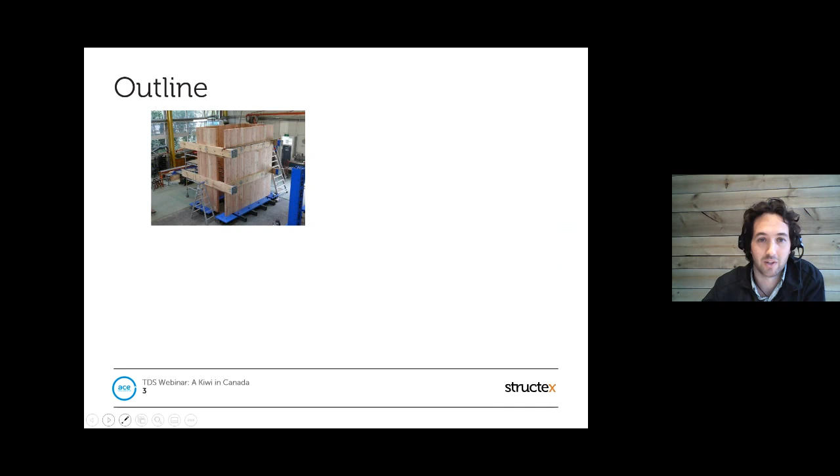So the outline today - I've tried through the presentation to have almost no words, so this is my picturama version of that. I'll talk a bit about some of my background in timber, which has been partially introduced, some of my observations from my time working in Canada and in the timber industry in general,

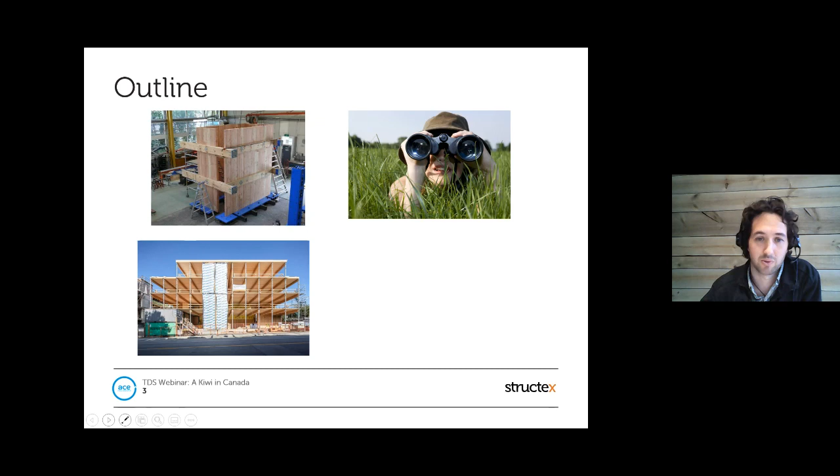and then go through a couple of case studies. The first one is the Fast Epp new home office building in Vancouver, and the second one is the Keith Drive office building in Vancouver as well.

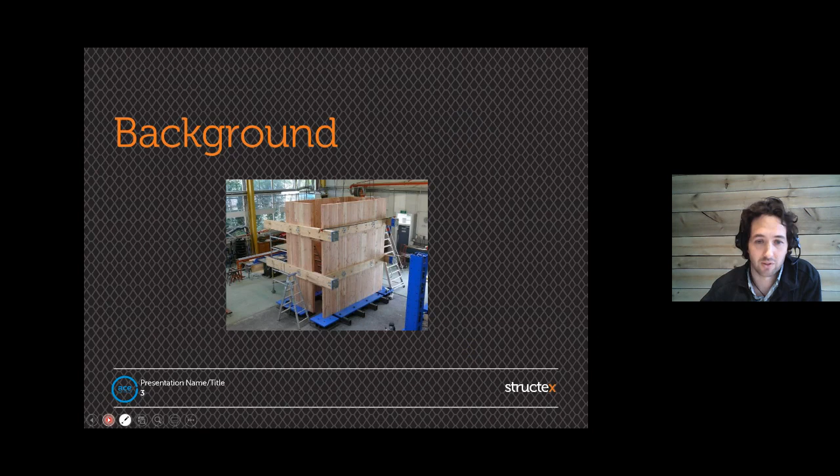So some background - for me, I did a master's out of Canterbury University at the end of the STIC program, looking at post-tensioned CLT shear walls. We ran out of LVL at that stage, and CLT was coming out of Nelson, so we managed to get our hands on some. In this case, looking at stair wells and lift cores and pushing those around.

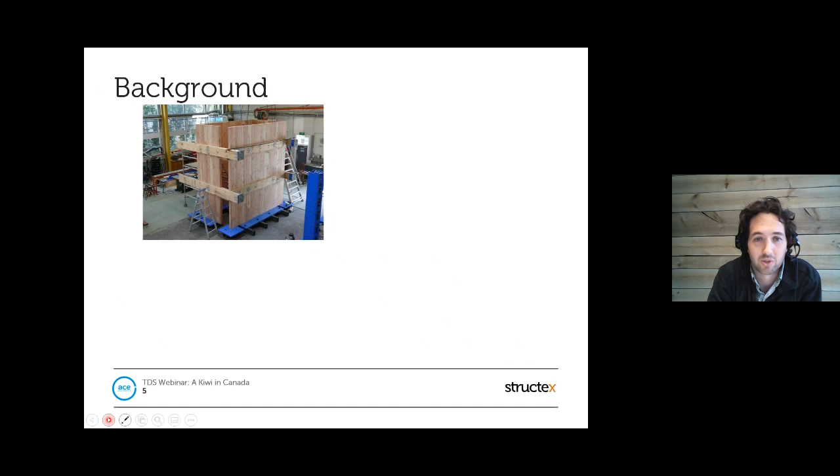Then I worked for Structex after leaving uni for a couple of years, working on a variety of timber, concrete, and steel buildings, but some timber, including the Christchurch Adventure Park buildings that some of you may be familiar with.

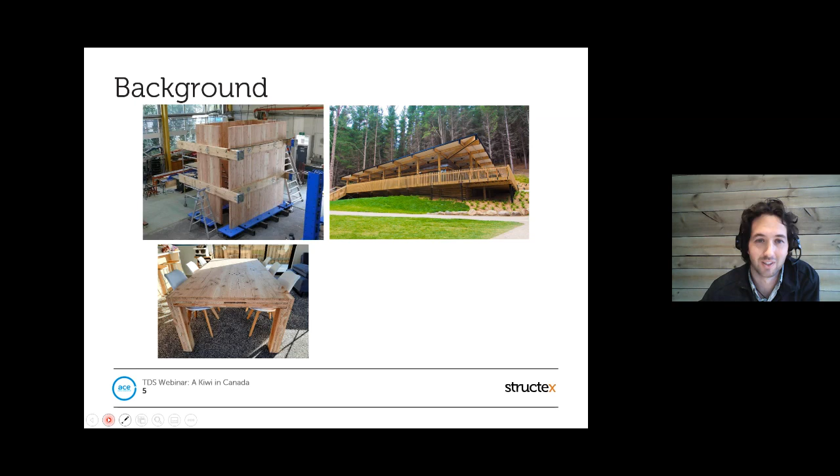So I kind of took some general learnings from all that and my masters. One thing I've found - some people say that timber isn't that recyclable, but I've found plenty of opportunities, especially for the post-tension CLT walls, to make great tables, even with voids for post-tensioning strands.

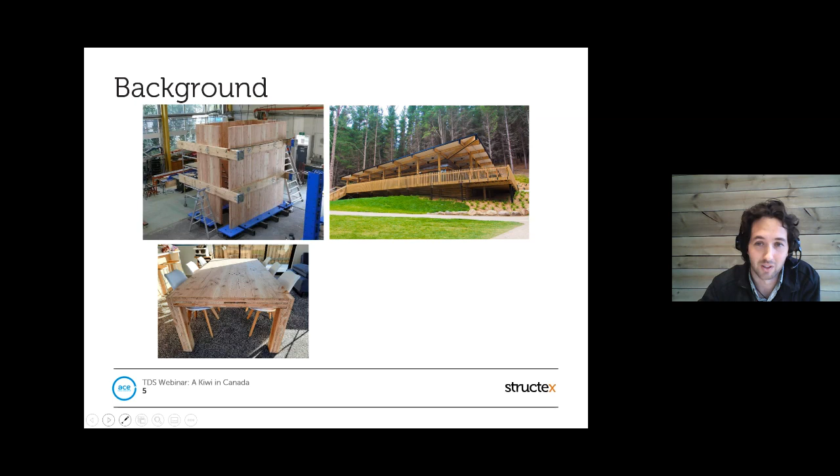But anyway, I wanted to broaden my horizons in timber a bit. So then I thought, what has lots of trees, what's still in a seismic region, where do they predominantly speak English, and where can I convince my wife to go? And that was Canada, and a company called Fast Epp, which was put onto me.

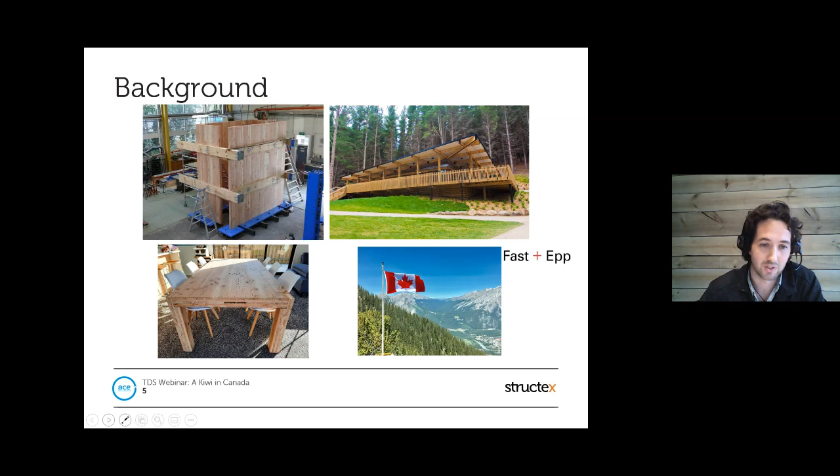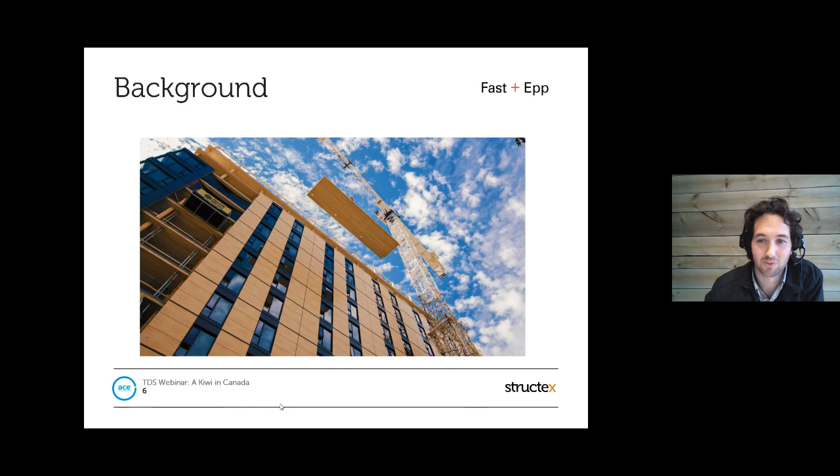I guess I would say it did have a concrete core though, or 2 concrete cores for the lateral system, but certainly the gravity structure was full timber for those 18 stories. This one was quite interesting, where they managed to get rid of all the beams, just using internal columns and point-supported CLT, which certainly has its own challenges and requires quite a lot of columns. But being student accommodation, that was easily accommodated within the room layouts.

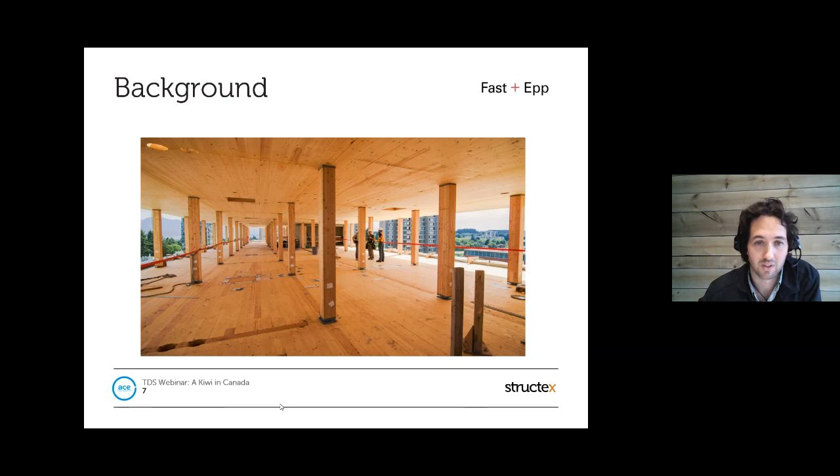From a constructability perspective, the building went up really quickly, at least a floor a week, with only 3 or 4 guys on site. The crane would drop in a whole bunch of panels, lay those, then drop on a pack of columns, and the guys would stand them up.

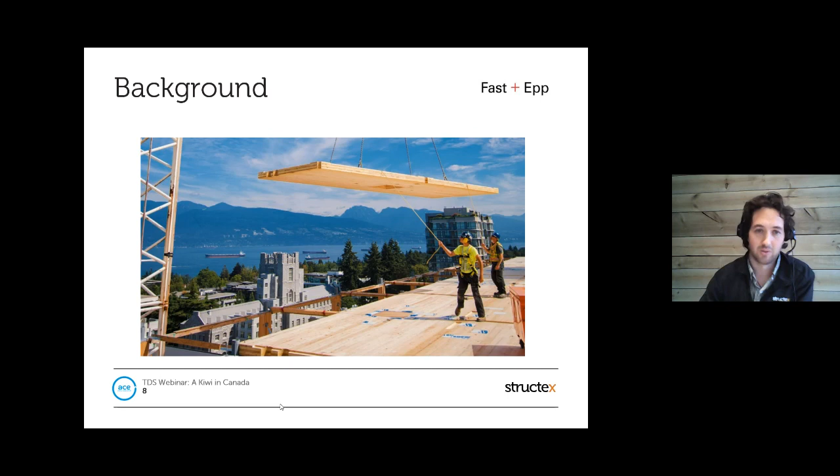Then the crane would go away and be lifting in the facade panels on a couple of levels below, and it ticked along nicely like that. There's plenty more if you want to look at this, quite a few webinars through the Woodworks Canada organisation that you'd be able to take a look at, but certainly worth some investigation.

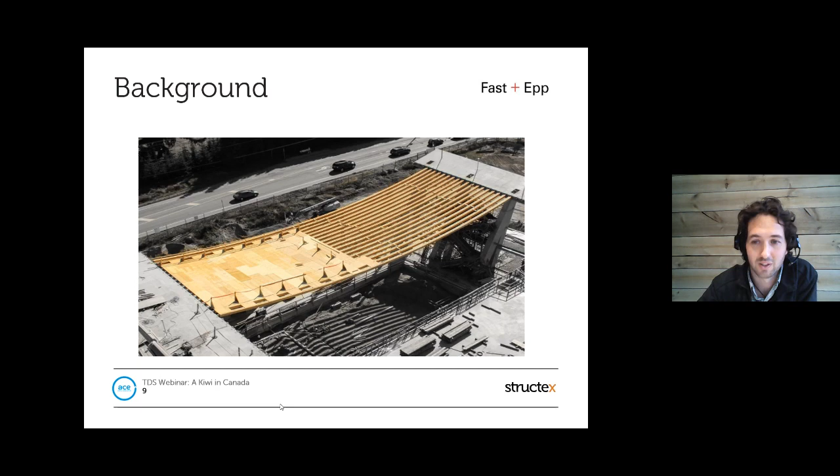Another favourite of mine from Fast Epp's history is this building, an aquatic centre in the wider Vancouver area. Probably the main feature, which I think is fascinating from a timber engineering perspective, is the use of timber beams and catenary action, spanning 55 metres with only 250 deep glulams, which is pretty unreal. It's just a couple of pairs of glulams running across, with a bit of plywood on top, and to achieve those spans is quite amazing.

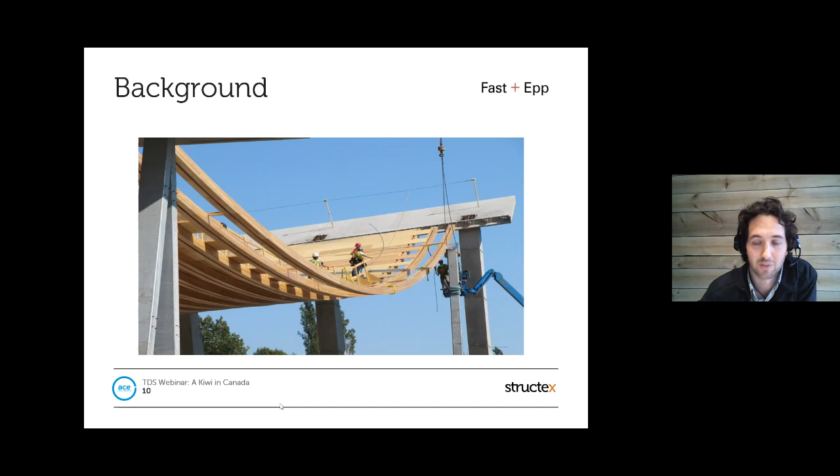And it also looks great from the underside, and I don't even mind the concrete even.

So yeah, a couple of quick examples of some of the things Fast Epp has done. It's only a small snapshot, but gives a little bit of context of the sort of things that they get into.

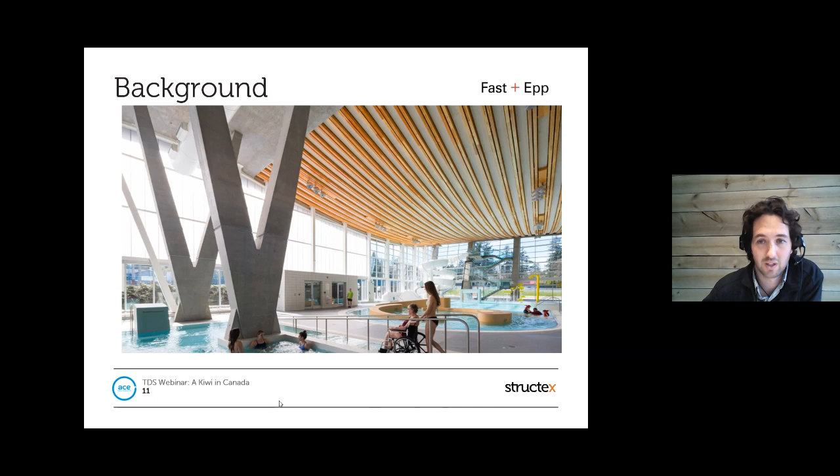So next is a few observations from my time there, in a general sense or at a high level.

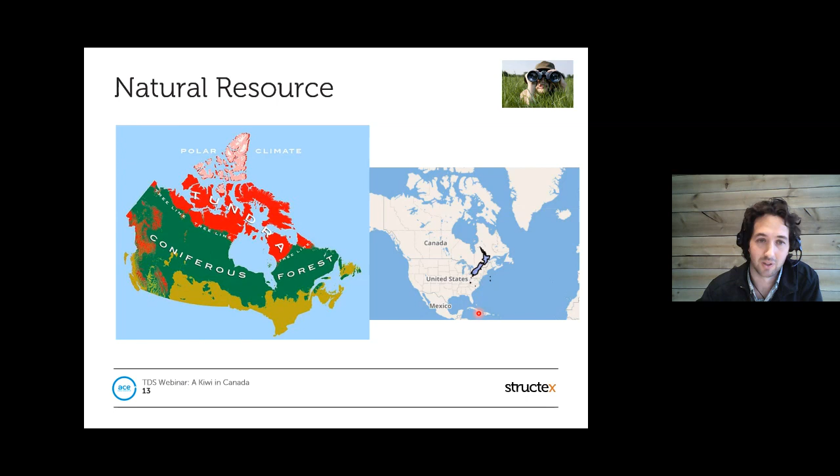It's well advanced, and they benefit as well from the native trees being the stuff that makes really good structural timber.

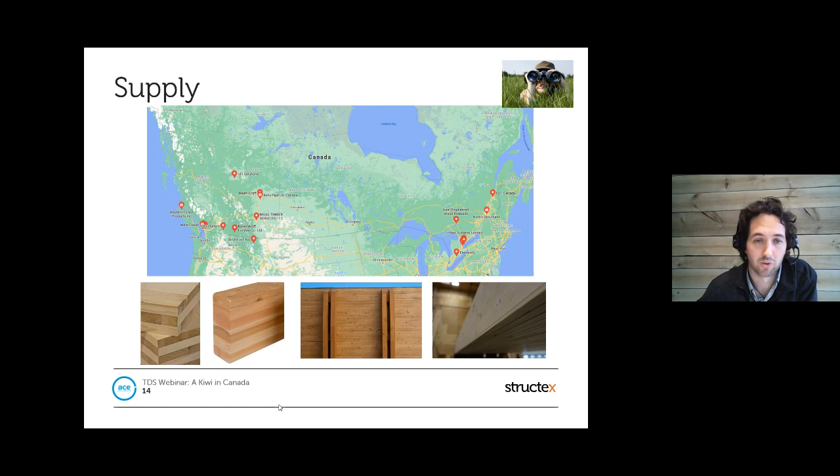Another key point from working over there is, I guess, earthquakes. On the west coast of Canada and the west coast of the US there's a kind of similar seismicity to New Zealand in a lot of parts, on the other side of the Ring of Fire.

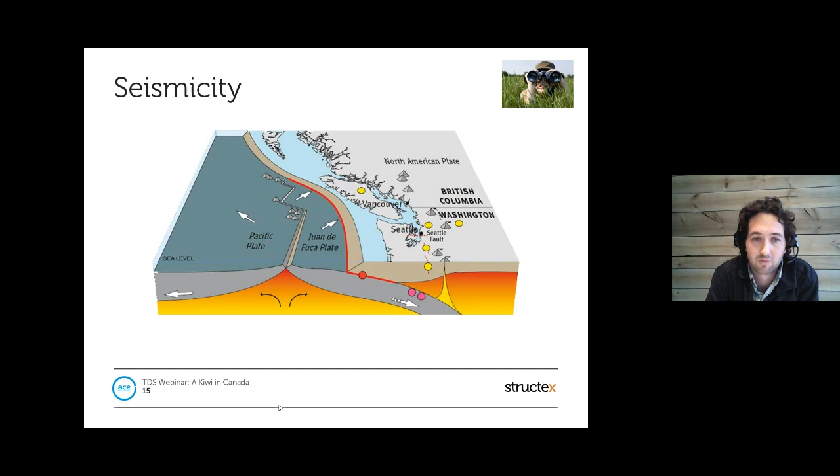From a design perspective, they certainly design for earthquakes. It's all through the codes, and people do it. But what I found was, in a general sense, sometimes they allow for earthquakes in the design at the time, but they're not always thinking about what would happen after the earthquakes.

So there's still a bit of ductile concrete shear walls and that sort of thing going on. I always thought about what happens here in an earthquake. This is downtown Vancouver, a whole bunch of large buildings, a lot of them ductile concrete shear walls or frames. On the right hand side are office towers, and the left side is all apartments.

It always grabbed me thinking back to Christchurch, how many broken or demolished buildings we had, and then what would happen in Vancouver if that happened as well, and where do people go, is my big question. So that's my high level take on a couple of aspects of Canada, in the supply. That frames hopefully into a discussion on these case study buildings.

So the first one I'll talk about is the new Fast + Epp office building in Vancouver, which I think is finished now, and they're in it, which is cool. My involvement on this one was through the design up until the construction phase, and they were starting in the basement construction when I had to leave to come home, but it's all done and dusted now.

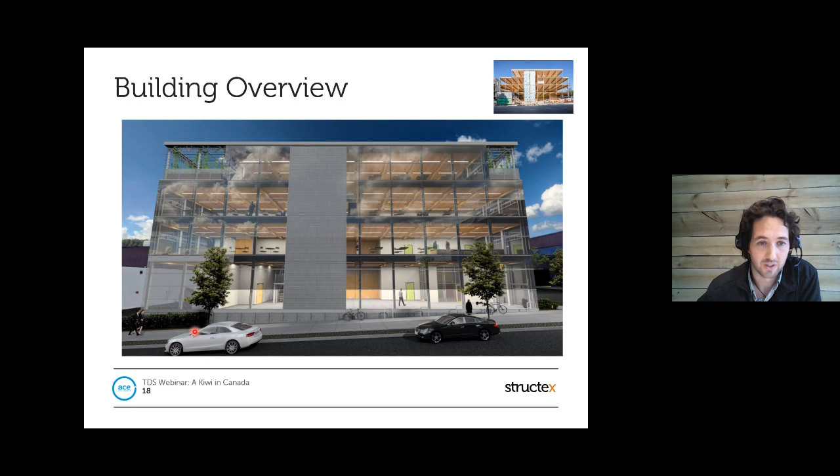The building use is predominantly office with open spans from one side to the other, and a mix of materials from concrete, steel, and timber, trying to use them predominantly where they make sense. Another big part of the design mantra was that it was in some ways a little bit of a test case, so they were happy for it to be somewhat experimental and pushing the boundaries, reflecting a little bit what Fast + Epp have done in the past.

I'll talk about the different aspects of the structure in a minute, but one aspect of the architecture was the use of some dynamic glazing, on show in the shot here, where they can turn on and off the shading of the windows depending on the sunshine to control the heat.

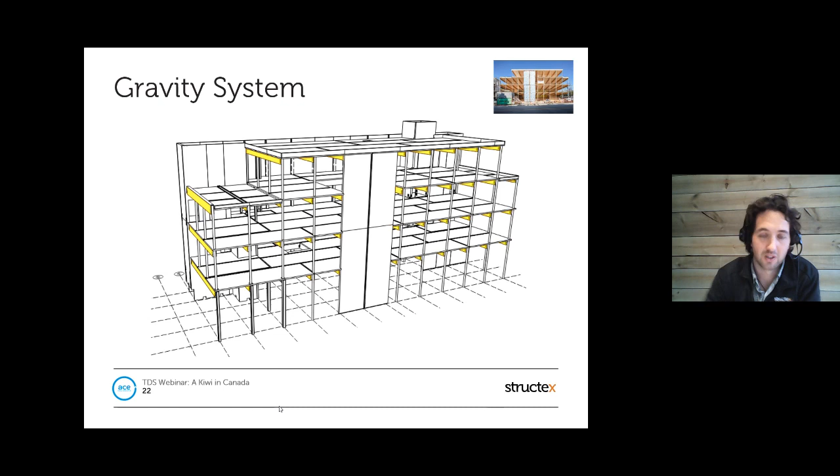So we utilised the char of the timber to provide the protection here, to keep all the beams and the floors exposed. And obviously the CLT also has to provide that char rating, so in some cases you don't get left with that much wood in the CLT floor, but it still works.

Into the columns supporting those glulam beams along the front was steel circular sections, which were kind of a bit skinnier behind the glazing and helped support that as well. So it was really kind of the right material. A glulam column in there would have worked as well, but would be significantly chunkier.

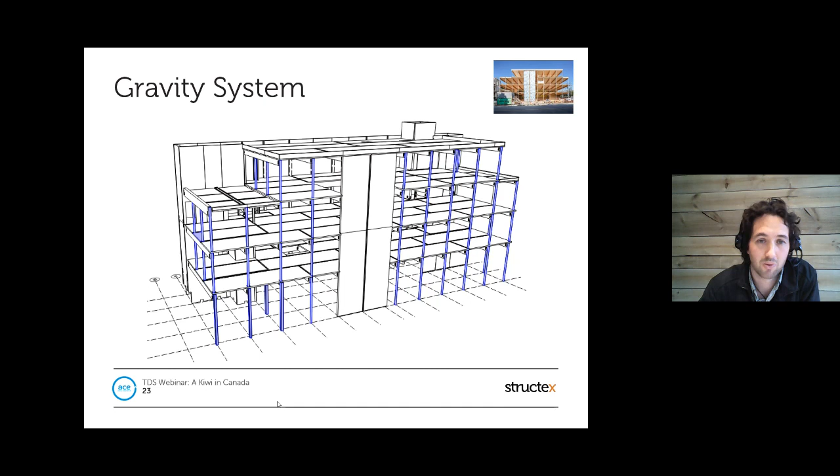So there were glulam columns on the back to help support the beams, and they were kind of semi-composite with the back wall, which were helping in the fire case as well.

So looking through a cross section of the building here at the beam and column elevations, we've got our glulam spanning right across, relatively chunky members to control kind of deflections, probably is the main reason.

Connections at each end were done with a group of bolts, which were set down in the section to reduce the need for any other screw reinforcing and control splitting. So we could have set them a bit higher, but we probably would have had to use some screw reinforcing, like in some of our presentations earlier in the webinar series.

And these bolts as well were required to be fire rated, so we had to set them a certain distance to allow for the char of the timber around it, and then they would be plugged with timber plugs. And the steel was intumescent painted, and painted around as much as possible, at the interaction with the glulam.

On the back of the building side, there was a little bracket with a similar connection into the beam that hung off the timber column, which then had another timber column stacked on top of it. So relatively simple to erect.

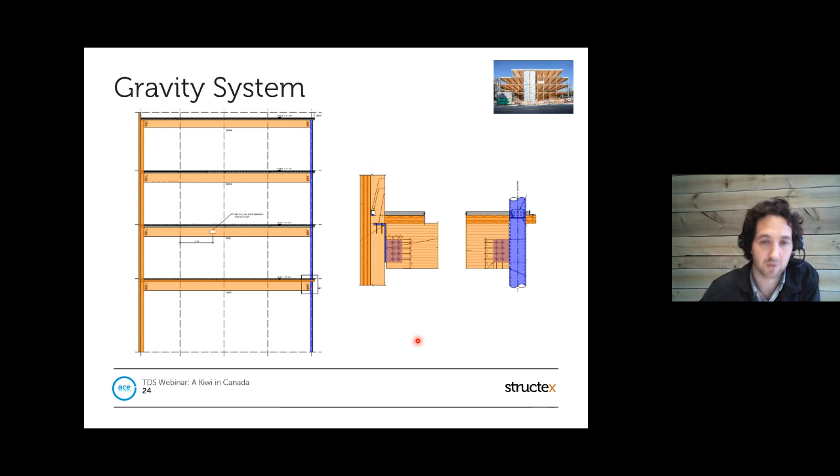We did look at tight fit pins here, but they're a bit harder to install, and it usually takes a bit more craneage time. So we went with bolts in this case, but effectively the design is fairly similar for that.

Now, looking at a construction shot of that installed, you can see the glulam beams across, a whole bunch of holes for the bolts which are yet to be plugged, our steel columns, and the exposed CLTs. So I think apart from the floor, the top of the floor down the bottom there, it's pretty much the finished product. Obviously a few lights and stuff hanging down, but it's really the structure on show in this case.

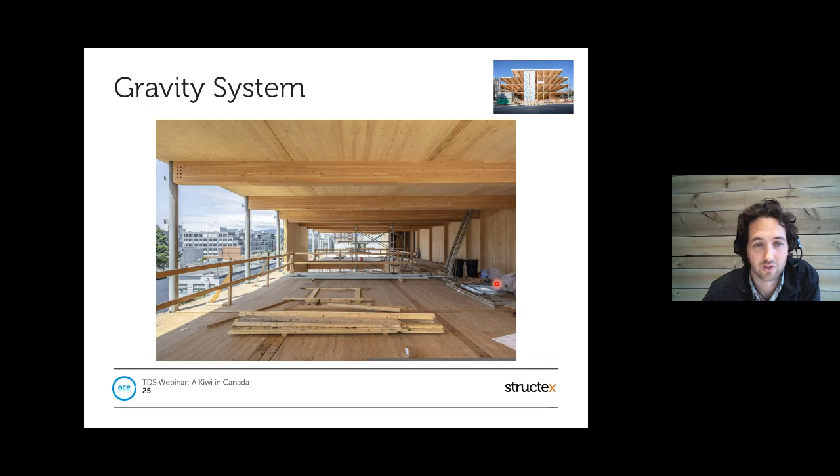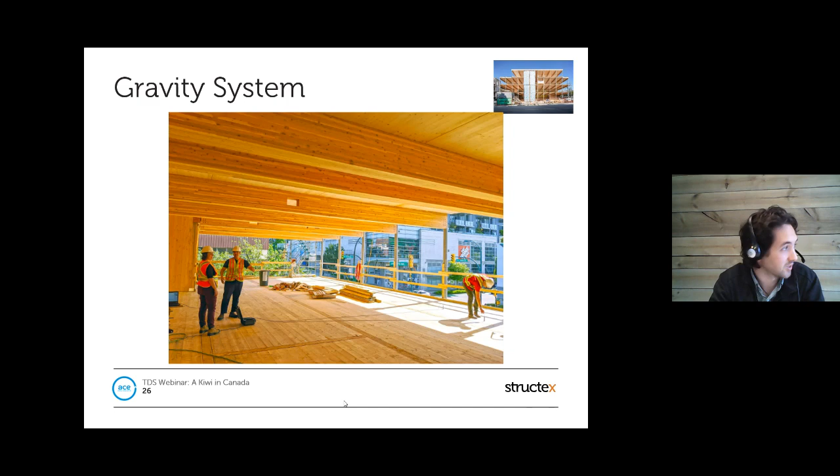So another part of this, which I'm sure everyone will be aware of for these long span and relatively lightweight floors, is vibration is quite an issue, or can be quite an issue. So the beams were designed for strength, obviously, and for the nominal deflection guidelines, but from some analysis there would be certain frequencies where the floor would behave relatively lively. So some vibration testing was done.

There were some prototypes done in a yard offsite, investigating the effects of having the beam and the CLT on top of it, and then what the effects of screwing in are, and how much composite action you get. From a vibration perspective it doesn't take that much to get composite action because the loading is so small, a person's weight, that a screw or a few screws into the top can often provide a composite action between the CLT and the beam that we wouldn't account for from a structural design perspective.

And then they took that initial testing and also did some testing in situ on site, and measured the effect and the influence of adding the concrete topping as well. And then I think the intention is that they do it with the fit out in place as well and see what frequencies they get out of that.

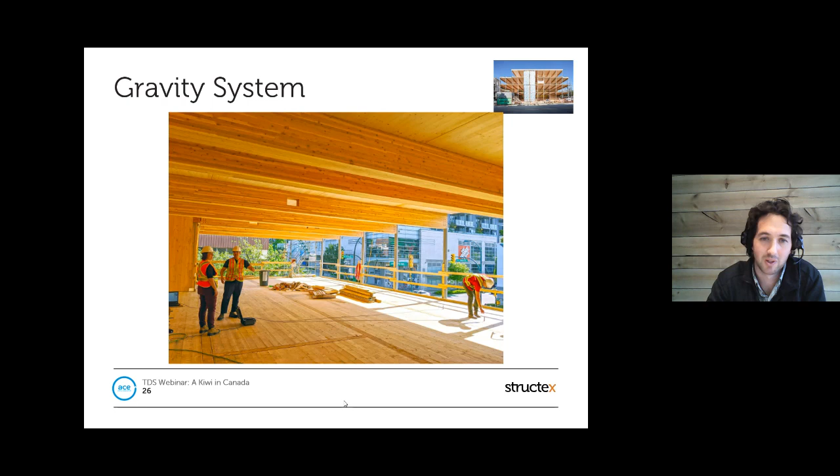I don't have results of the vibration analysis, but we can probably put you in touch with someone that does, and I'm sure there'll be a paper or a presentation coming out on that out of Canada at some point.

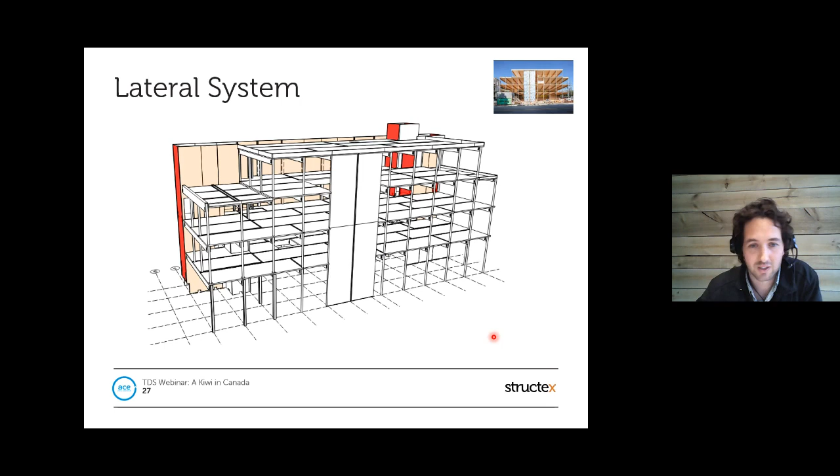So now into the lateral system, which is largely done by CLT shear walls. We've still got our boundary wall along the back, which is a whole series of walls, and then we have a series of red walls marked on here, which are perpendicular to that for the other direction. Of note here is that the two big walls out the front, which you'd think look like shear walls, are actually just gravity walls, and we didn't use them in this case, which took me a little bit to get my head around. I didn't really like the eccentricity of the system.

Thinking back to some of the lessons from Christchurch, it's certainly wise to try and avoid that where possible. However, in this case, part of the limitations on the lateral system were that along the boundary at the top of the page here, we could only deflect about 100 to 150 mils at the top, which is less than 1%. So in the end, I came around to a long, big, skinny wall with a whole bunch of other walls helping resist the twist.

So the system, if we ignore the big dissipator in the center of the page for now, the original system didn't necessarily start out or target to be a low damage system. In the Canadian code, for shear walls like this, you're allowed a ductility of around 2, and then there's an overstrength factor as well of about 1.5. So it's kind of the equivalent of our Sp factor - it'd be like reducing your lateral load by a ductility of 2 and an Sp of maybe 0.6 if it was a direct comparison. But it doesn't really give you a whole bunch of commentary on how to achieve that ductility.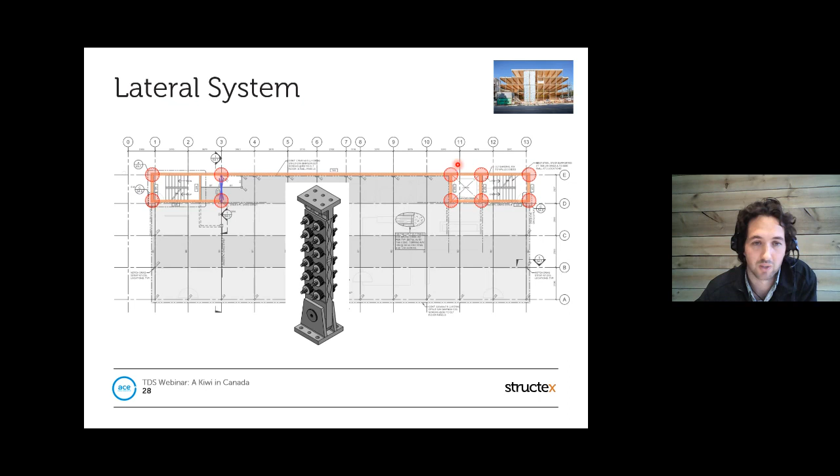So we came - and it was good timing - to Tectonus, which I was aware of from New Zealand, but not many people knew about it in Canada. It was good timing really that we were able to integrate this within the system to give some resilience to the lateral system, and it helped me feel a bit better about the twist, that we had a reliable, resilient system that wasn't going to let go after a few cycles. The wall at the back was effectively designed elastically with splice panels connecting one to the other, which I'll talk about in a minute.

So a bit of a zoom in on the bottom of these shear walls. We had our Tectonus devices - I think these were, from memory, about 700 kilonewtons each, which were connected to knife plates up into the CLT with a whole bunch of tight fit pins, designed to the overstrength of the Tectonus device.

From what I hear, the installation of the devices and the connection between the plates is relatively easy, but they did find it a bit difficult on site and in the shop to install all these pins, because there can be variation between the CLT where the holes have been drilled by a CNC machine and the tolerances of the steel plate, which may not be as tight. There can be some persuasion needed to get some of those pins in.

In terms of a shear key, you might see there's a little concrete plug in the middle - we used that as our shear key. We just left some bars sticking out of the foundation, and then they came back and filled in that hole. So you'd see from this detail, it's not necessarily a pure rocking system - there will be a bit of binding up on that shear key, but with the deflections trying to keep them to a really tight limit, we weren't too worried about that.

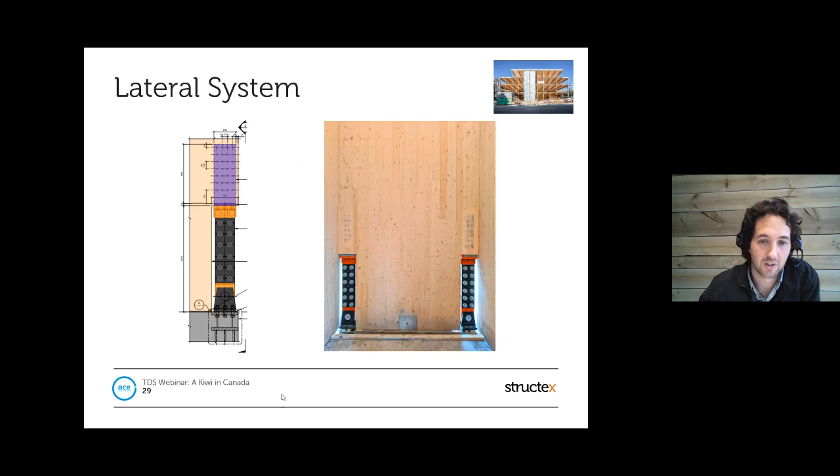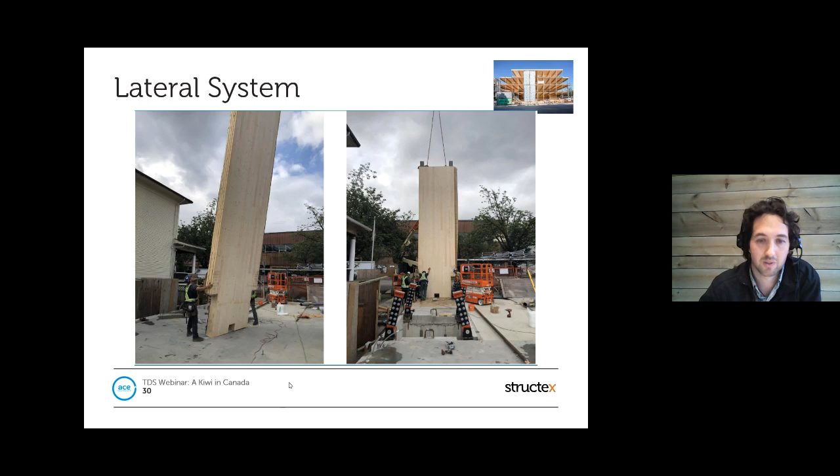There's a couple of shots of the walls going in place, which went pretty quickly. They came pre-installed with the knife plates, and they just bolt them together to the Tectonus, with a little bit of tolerance in the bottom. Put them on the crane with a couple of guys pushing them around, and it went quite well.

The back wall here, again, a series of panels beside each other. The connection between each one was typically a plywood spline joint with just nails and screws holding them together. And then typically you can see here there's a few columns which are usually lined up over the top of the joins.

So in an earthquake, we're expecting these to be largely elastic. If there ever was to be a really large event and you needed to try and strengthen these, we would expect that you would just put some brackets in on each side, or re-nail or re-screw the existing joints. That's kind of the extent that we would expect to see.

So we found this along direction isn't necessarily low damage, but one of the main modes for the along direction is a twist, which is then countered by the Tectonus and rocking walls. So we felt quite comfortable around how the system would perform, albeit not a traditional or a full kind of complete no-damage design, but certainly an increased resilient design.

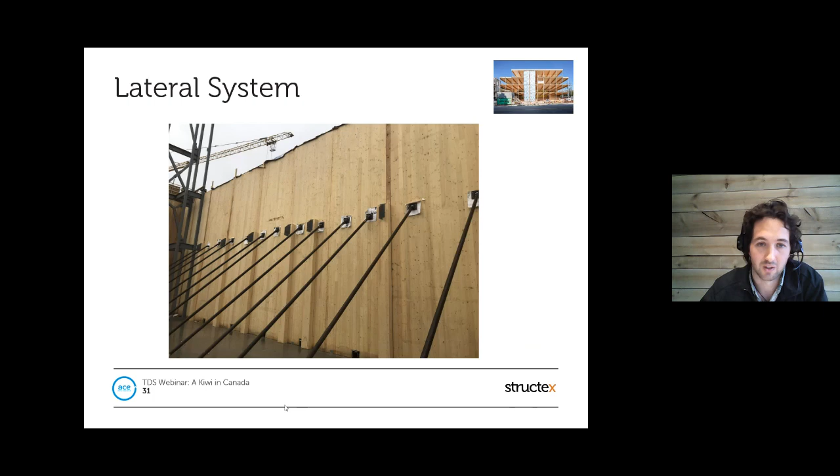Through construction, shots here - I think some of the original goals were to try and have the superstructure go up in about a week. It was a little bit slower than that, partially affected by COVID requirements, I think. But it was still very fast, in a matter of probably the 3-week range to get from the basement slab or ground floor slab to panels on the roof. It was very fast.

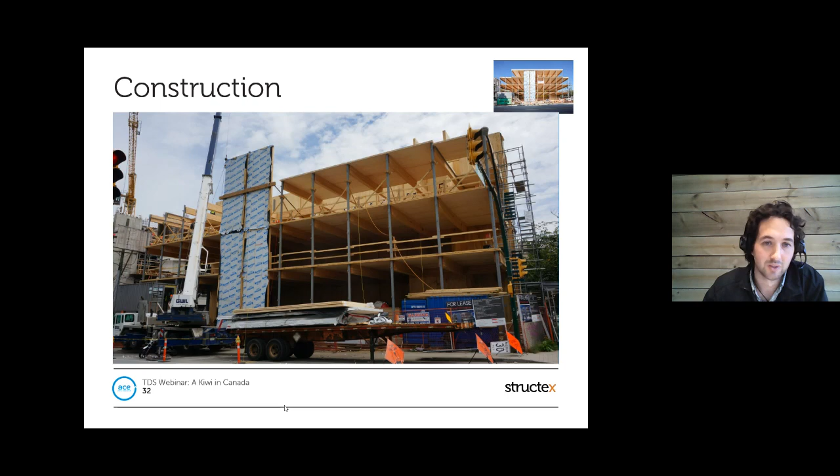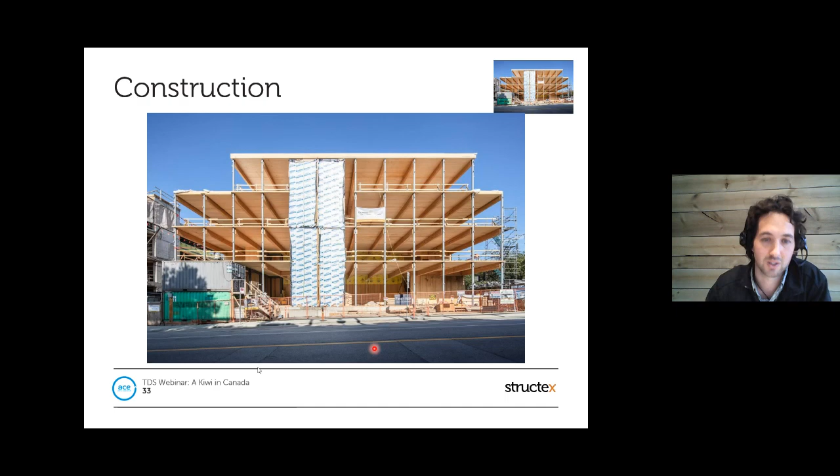And then the kind of final pre-construction shot, again, pretty much all the beams, columns, and floors exposed in the final case. And then looking at the completed building, pretty much as it is now, I think.

Yeah, so that's the general gist of the Fast Epp building. Relatively quick overview, but I'm sure there'll be some questions about it. Probably in summary, the main drivers were speed of construction, utilizing materials in the appropriate manner where it makes sense, and looking at some increased resiliency in the seismic design and being a little bit experimental and pushing the boundaries.

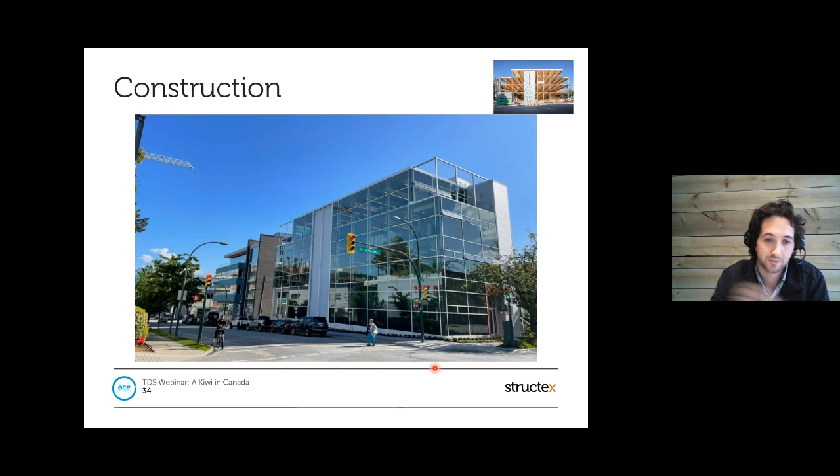So the next case study, which I was involved in, was this building for Keith Drive in Vancouver. I was involved through the design of this until about the consenting stage, and then I was on a flight back to New Zealand. Since then, it has progressed a bit with some component testing, further analysis, and through the consenting or building permit phase, and I think it's in the ground now.

Getting started, in terms of the building overview, it's a 10-story structure over 4 stories of basement parkade, situated on a sloping site, which is relatively significant - over about a story, or 3 or 4 meters, from the back to the front.

The template is pretty much an office layout, so targeting large open spaces, not too many impedances through the layout, and then a key driver was the kind of expression of the structure into the architecture.

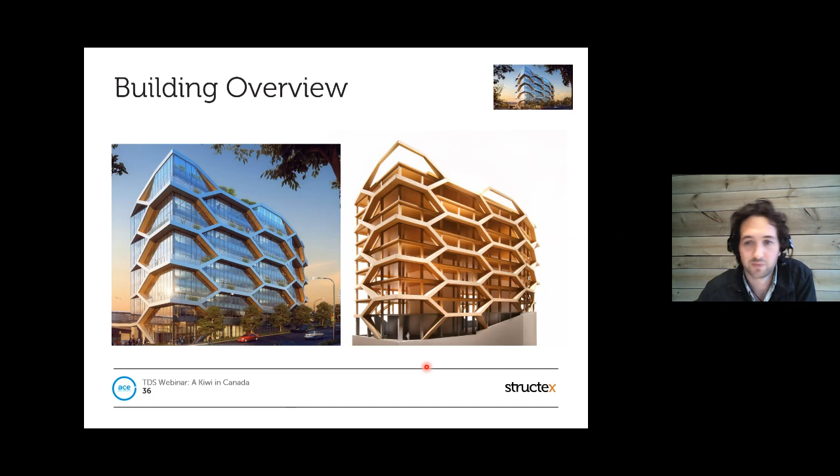So the general structural system is looking at a kind of traditional post and beam for the gravity structure, then mixing in some lateral bracing around the perimeter, which was expressed and made part of the skin from an architectural perspective, and was really driven from quite an early stage. This sort of imagery hasn't really changed.

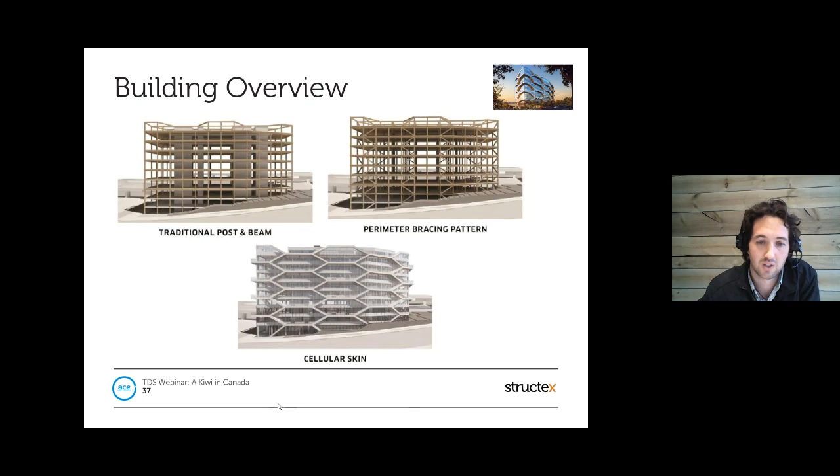So in terms of the gravity system, we had glulam beams supported on glulam columns around the perimeter, steel flush beams through the middle so that didn't poke down beneath the floor, and then CLT floors spanning directly from one side to the other.

So this one's a bit different than the other Fast Epp building, where we're spanning 8 meters directly in a CLT panel, which is not necessarily the most materially efficient, but does allow a really clean ceiling from the other side, and potentially saves some height of the building. If we had secondary beams spanning across, and then CLT on top, you might lose 300 or 400 mils each level - times 10 stories is another floor. So there can be efficiencies in using this, as well as we needed a 2-hour fire rating, so the thickness of the panels helped there.

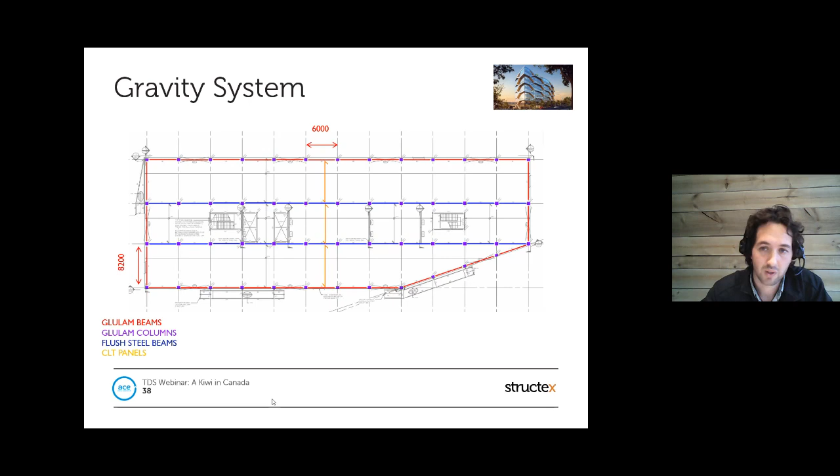So looking at the panels a bit closer, we did use a bit of trickery to try and reduce the volume of timber or of CLT spanning across here.

So in a lot of the Canadian suppliers, they tend to make their CLT panels in kind of billets, so could be 3 meters wide and 2.4 meters wide would be typical panels. So sometimes if you had a 2.8 meter panel, they would make a 3 meter one and cut it down, so you get a bit of wastage.

So what we tried to do here is take a kind of hit and miss approach of a 300 thick CLT that was 2.4 wide, with some little notches in the top, and then an 800 mil section of 3-ply CLT, which would basically span between the two, which was also divisible by 2.4, so they could cut it out of a 2.4 panel. That allowed some room for a service chase to go across the building through that space, and also breaks up the ceiling a little bit from the underside.

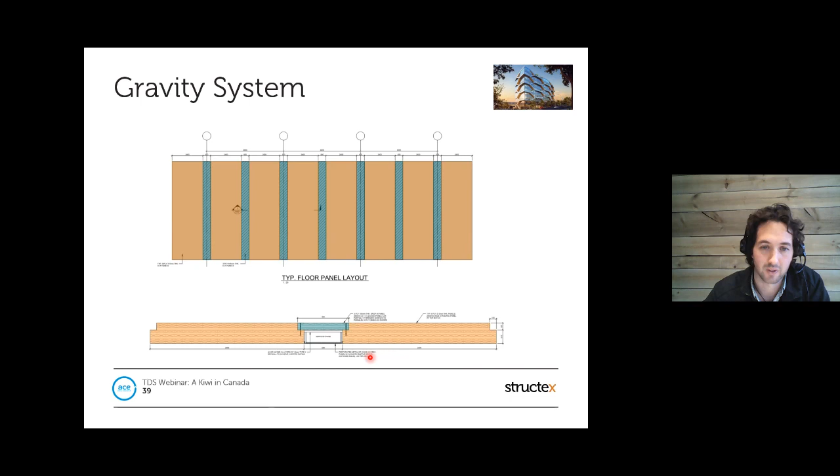In terms of the beam column connections, from column to column, we used a steel SHS that kind of joins one to the other. That was something that came out of the Brock Commons building that worked quite well, where you have pretty much 1-story columns that you can stack up and handle easily, and allows people to do it on site while the crane's doing other things.

Then we had our beams coming into the column using a pre-engineered off-the-shelf product, which in this case was a Megant, originally out of Germany. The column would come with one side all screwed into it, and the beam would come with the other side, and then on site you click it together and run the bolt through it, and you end up with a fully concealed connection, which is also fire rated by the timber wrapping around it. So that worked well through the building, and certainly helps through the design side.

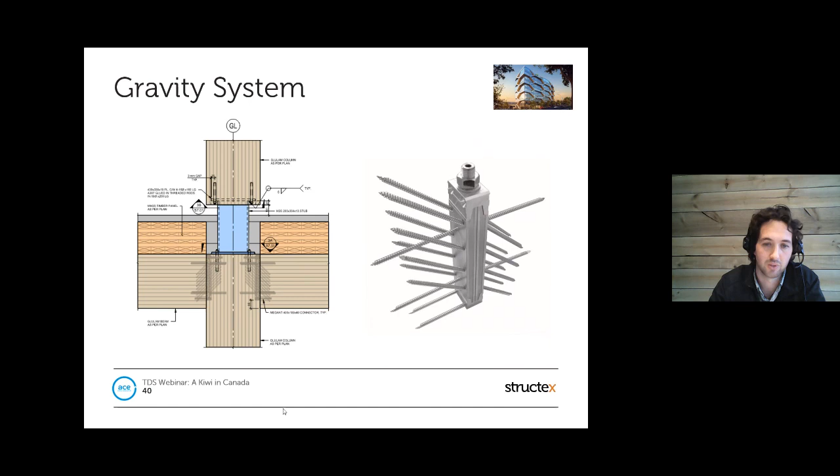And then CLT sitting on top of that with a bit of concrete topping and an acoustic mat, similar to the Fast Epp building on top of that. Through the central beams, we had these steel flush beams, which was an SHS section with a big fat bottom plate on it for the CLT to sit on, and then that connected across and sat on the timber columns, with a little bolt through.

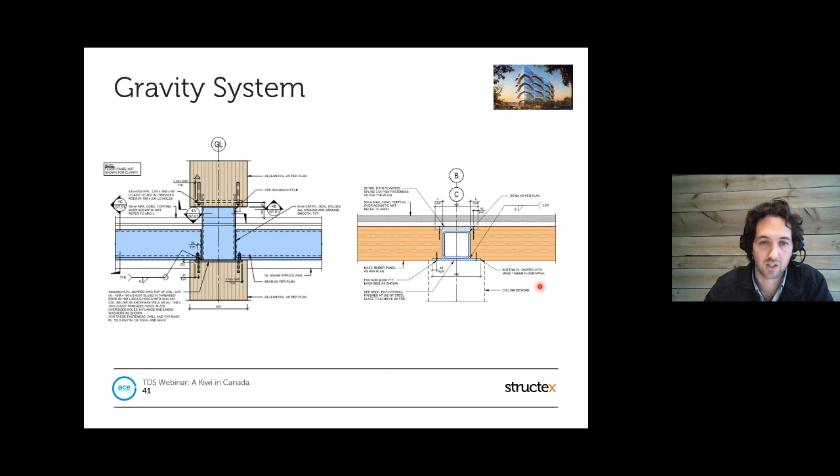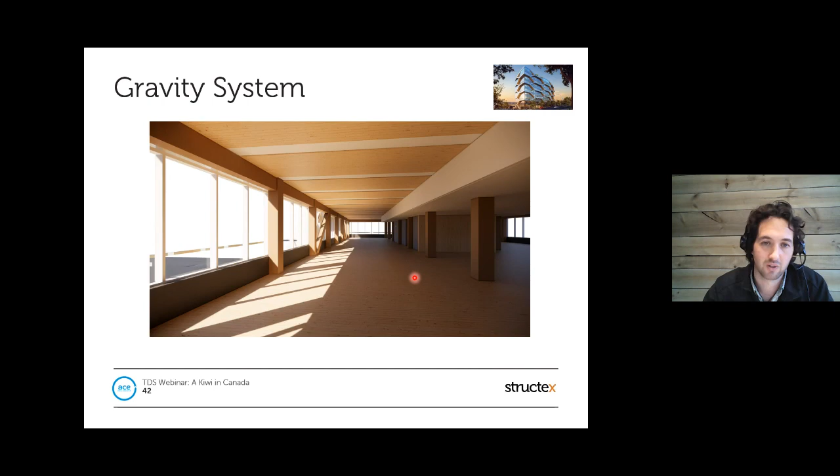And then another nice render of what the intended product is supposed to look like, with nice people and furniture in there.

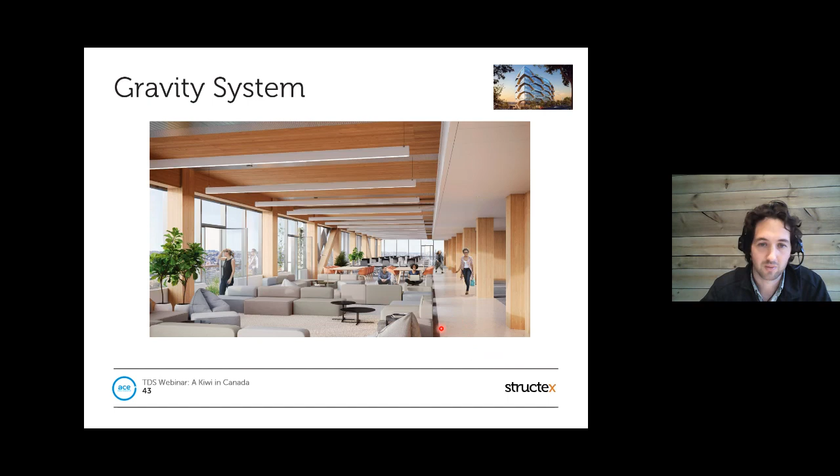So the lateral system involved, well, one of the key drivers from the project was to make an all timber lateral system, which is kind of pushing the boundaries for what has been done in seismic regions from around the world, being 10 stories. So we have quite a regular perimeter brace frames, and then a series of internal CLT shear walls.

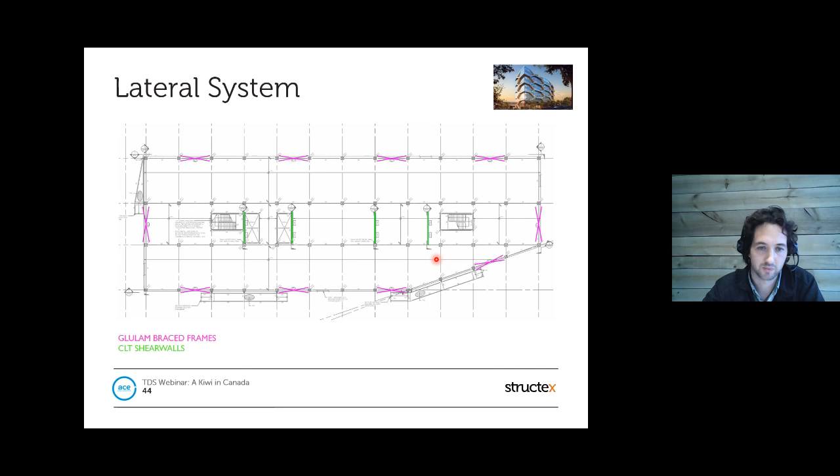So for the brace frames, again, I think this was well outside kind of code allowances, but there was another avenue to do it. The recommended ductility was 2 with a 1.5 over strength, similar to the previous building.

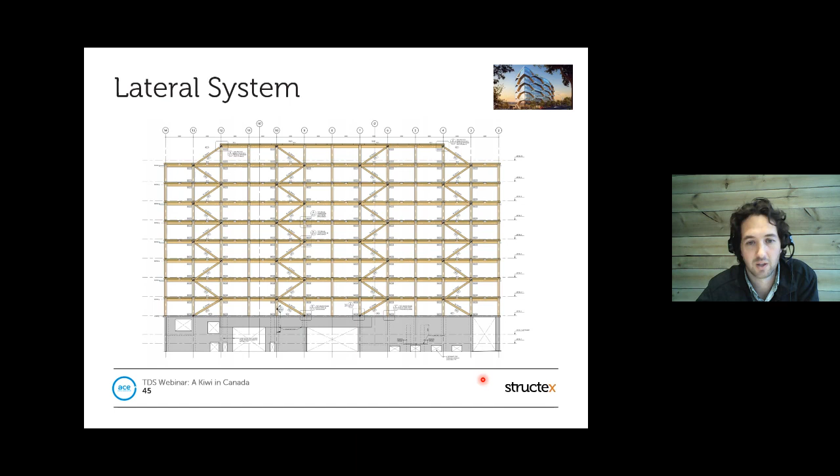So the original strategy was to use a yielding steel mechanism with some perforated plates that would yield through the movement. However, through some physical testing, that kind of didn't provide the level of robustness that was needed here, and would require some significant work to replace it after an earthquake. So the decision was made to go to a Tectonus system on the back of the previous building's successes.

So in the brace frame, this is kind of the typical detail. For the brace, we had a double Tectonus unit with a telescoping kind of SHS tube here to allow the movement in and out, but provide some stability to that brace. That was connected in through a large knife plate which traces through the column, and a whole bunch of tight fit pins that are hammered in there, and some bolts. So quite an involved connection, but some quite large forces going through it.

And I think it would be interesting to see how this comes together on site. I think the intention would be that the knife plate comes all nicely done with the column, and then you bring your beam in and can bolt that on. Bring the beam in from the right hand side and connect up the nice easy Megant, and then go from there.

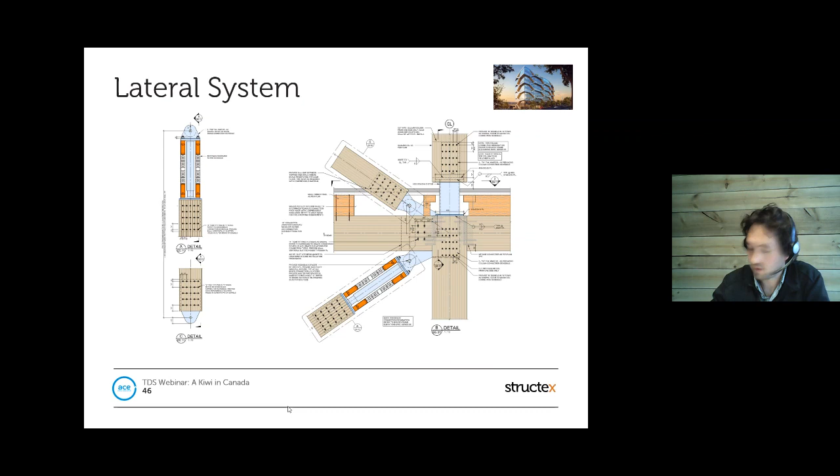We don't have heaps of time left, so we'll push on into the CLT shear walls, which are obviously relatively large here. They're made up of, you can see the alternating colors there, which are denoting different CLT panels. So pretty much 3 panels wide, I think in total maybe 7 meters wide, something like that, and then a few stacks of panels.

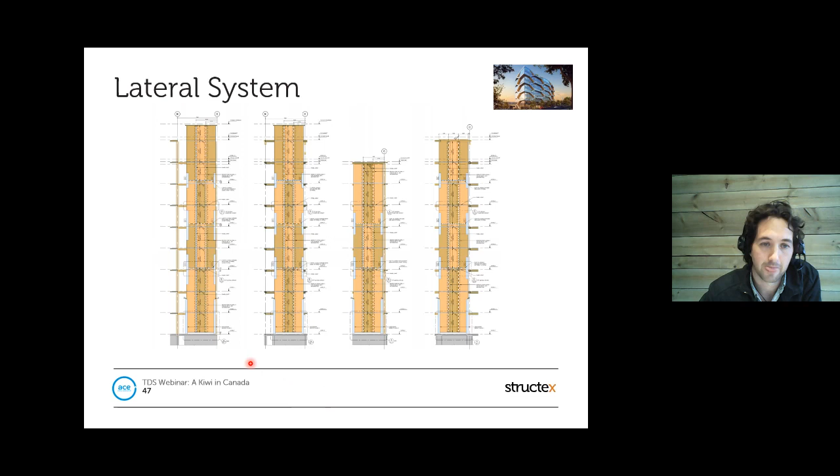Up the height there were connections, tension connections at different levels, and shear connections between panels, pretty much up and down the whole walls, with a big base connection at the bottom, which is this one here, using Tectonus as well.

So this connection changed a bit since I left, but I think the principles are fairly similar. We've got a big concrete wall from the basement below, and we have some Tectonus devices at each end, which are then connected into a steel column. So that connection is relatively easy, steel to steel. And I think the hold downs we needed here were in the order of something like 2,000 kilonewtons.

It may have been more in the final design. So we've got that huge load getting transferred into the steel boundary column element, which then has to be connected into the CLT panels. This is a hold down basically going over 1.5 stories. It gives you a bit of a picture for what the load is that needs to be transferred, and some of the difficulties sometimes in getting large loads into timber.

Through the middle here we have the little spine plates which are screwed or bolted on the front, and down the bottom we have this nice idealized pin which is anchored into the bottom of the CLT panels with a series of little gussets that are grabbing the CLT and using the bearing.

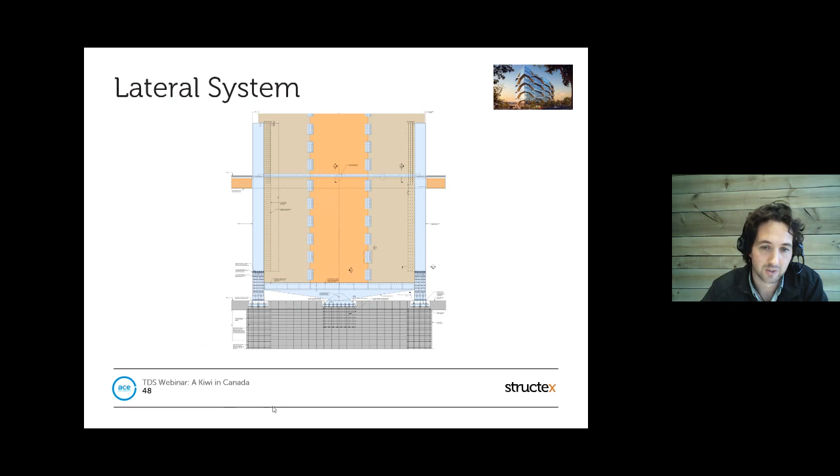So that's kind of the main bits from that building, which was a relatively fast flick through it. I'm sure there'll be some questions on that, which we can cover off.

But I wanted to say a little bit of a spiel here for both of these buildings, the support that they got. So they both benefited from some funding supplied by Natural Resources Canada, or NRCan, which went towards progressing these mass timber buildings. So you could get funding for things like extra design that would be required for timber that you wouldn't have to do for steel or concrete, or extra things that you might have to do on site, like some weatherproofing and stuff that you wouldn't have to do for steel or concrete.

But it didn't go specifically towards the actual construction cost or material cost. But we found it really allows these buildings to kind of go ahead well, and provides a lighthouse for other buildings or other people thinking about similar things, and had influences on code changes and that sort of thing.

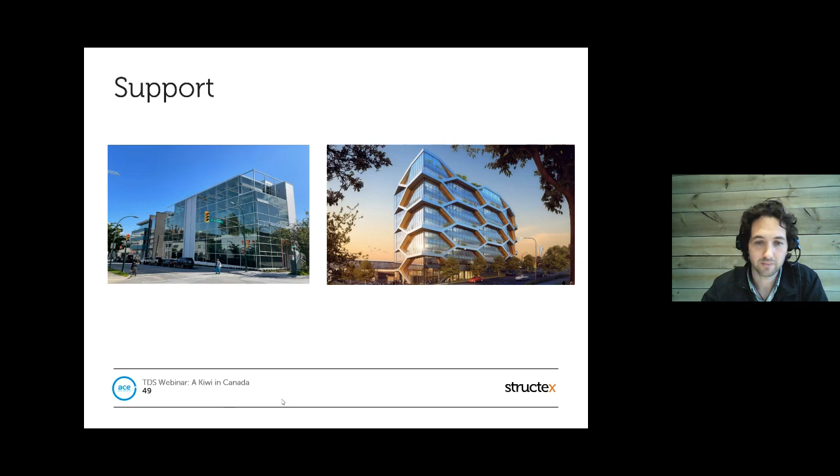So to summarise, my thoughts are in the mass timber realm, we would be trailing Canada for now. They've certainly got the advantage of the hundreds of year old industry and the amount of natural resource that they have available, and also the quality of that resource, which is quite superior to the radiata pine that we have here. And the adoption of mass timber is relatively widely accepted, and it's not an out there thing to do for a number of building types.

Second part is, I think from New Zealand, we've got a good head start on the seismic innovation that comes with designing multi-story buildings. And I think certainly it's showing that even in Canada, for a couple of these buildings, that we have New Zealand technology going into those.

Third point is Canada certainly benefits from the reliable material supply. And I think in New Zealand in the past couple of years, we have probably suffered a little bit from that. But now with Red Stag kicking off and XLAM supplying in here, and a number of other suppliers coming online, I hope those problems are getting behind us, and we can really rely on that supply coming through.